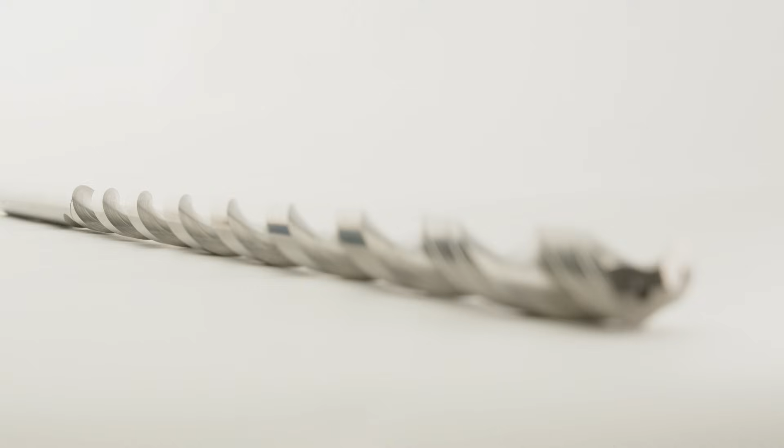Many modern cutting tools are designed with through coolant holes that deliver coolant directly to the cutting edge. The direct delivery ensures coolant reaches the area under the most stress, helping to control heat and improve cutting performance. The through coolant also aids in chip evacuation, which is especially critical in deep hole drilling, by flushing the chips away from the cutting zone.

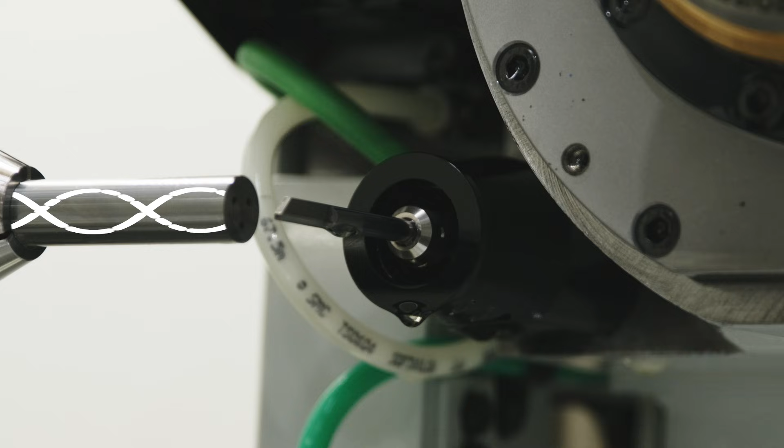These coolant holes are typically sintered into the carbide blank. Because they're fixed within the tool blank, it's essential that the cutting geometry is ground in correct alignment with the coolant paths. This ensures that coolant exits exactly where it's needed and that the tool performs as intended. Proper orientation of the holes relative to the flutes, margins, or inserts is a key consideration in both design and grinding.

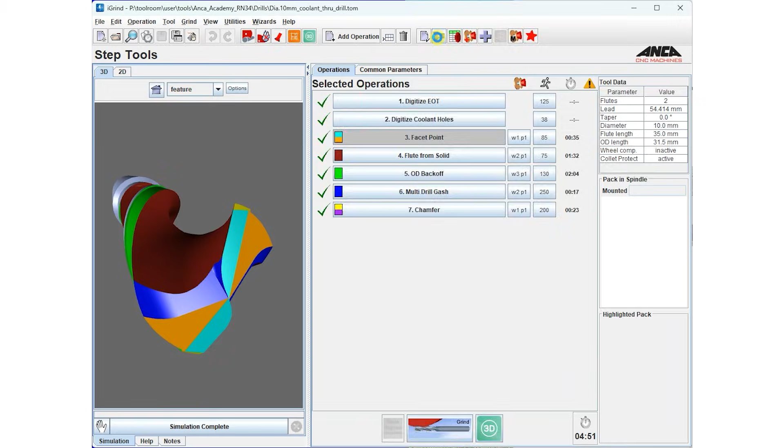The first step to making a tool with through coolant is to program the coolant holes in iGrind. Open the blank editor and move to the coolant holes tab. Here we can select from 4 different types of coolant holes. Simple holes gives 1 hole for each flute on the tool. The user can define the hole diameter and the spacing radius from the tool center.

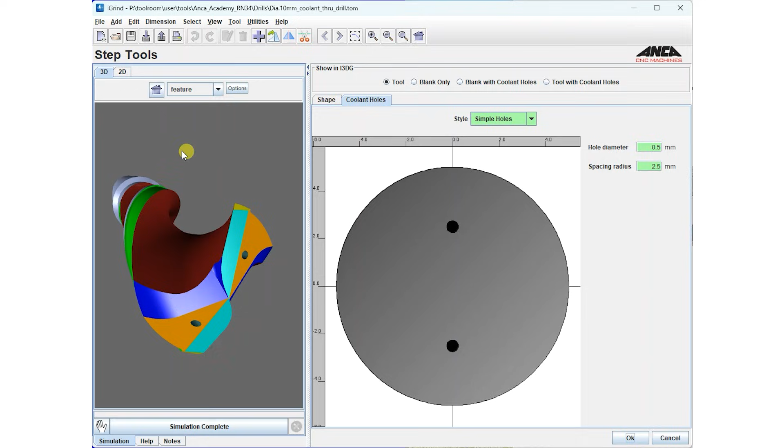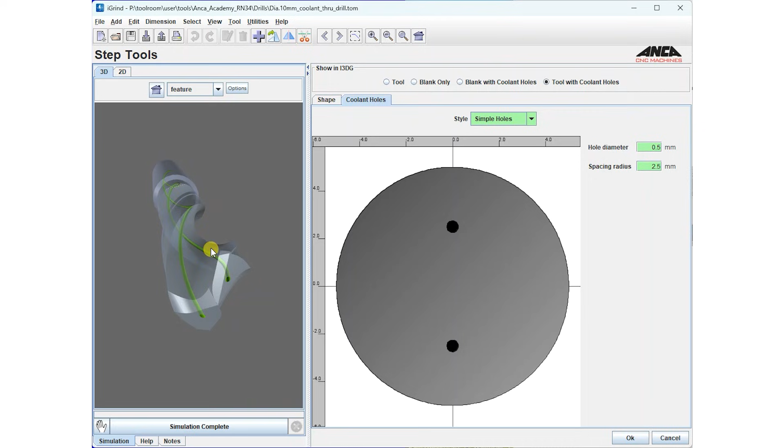We can also change the display in the i3DG window. Right now we can see the tool. We can change this to the blank only. We can have a translucent blank with coolant holes, or a translucent finished tool with coolant holes. And we can see with the simple holes that the holes follow the spiral that's programmed in the common parameters.

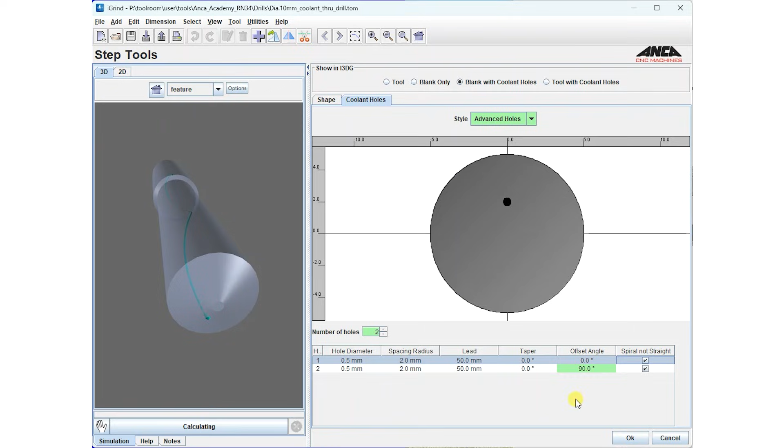The second style of coolant holes is the advanced holes. Advanced holes gives the user complete freedom in programming the coolant holes. The number of coolant holes and all parameters for each hole can be set independently. So we can change the hole diameter, spacing radius, lead, taper, offset angle, and we can configure the holes to either follow the tool spiral or be straight. And you can see that both these holes will act independently of each other.

The next type of coolant hole is a single axial hole. A single axial hole provides a straight hole running down the tool center, where the user can simply input the hole diameter. Not really applicable to this type of tool, but can be used on end mills and other types of cutters.

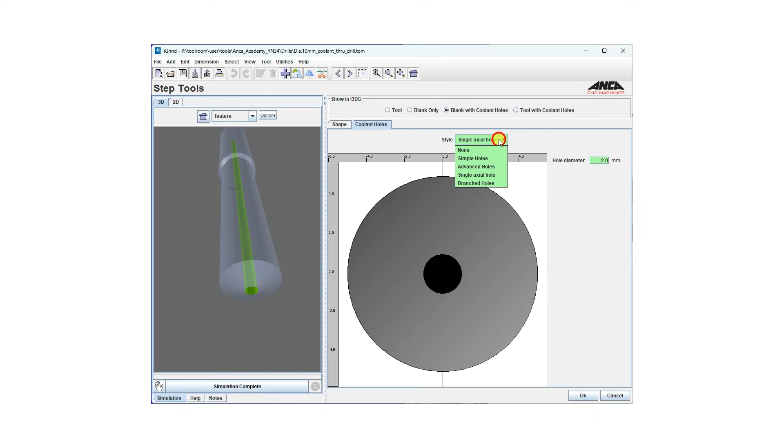The final style of coolant holes is branched holes. Branched holes sets a single axial coolant hole which branches off to multiple holes at specified points along the blank. Multiple branches can be set with configurable branch and rotational offset angles.

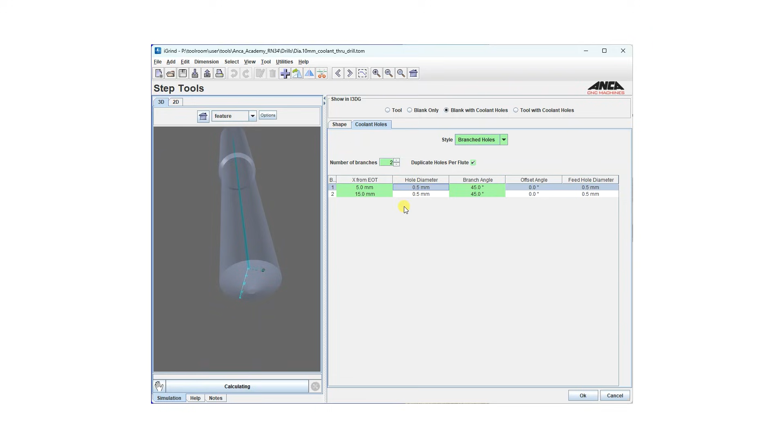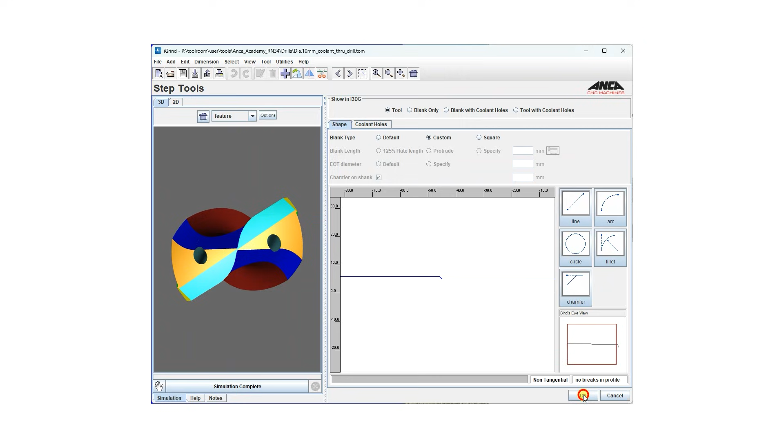Once we're happy with our coolant hole style, diameter, and positioning, we need to position the coolant holes in relation to the cutting edge of the tool. So to do this, we use the digitize coolant holes operation, and we can select the A offset from hole parameter. This parameter controls the angular distance between the cutting edge and the center of our coolant holes.

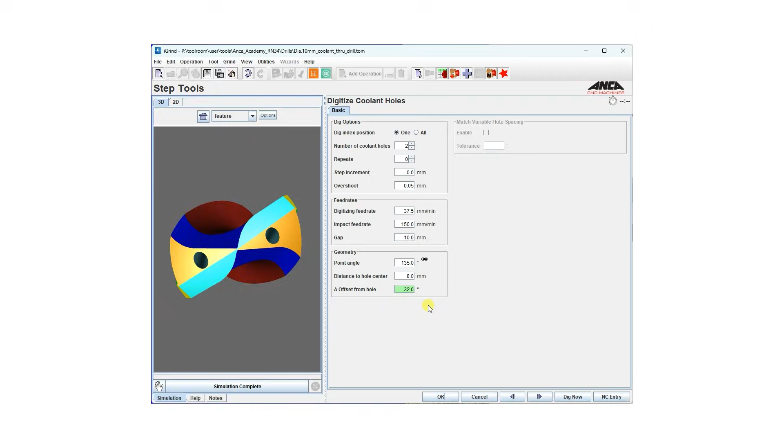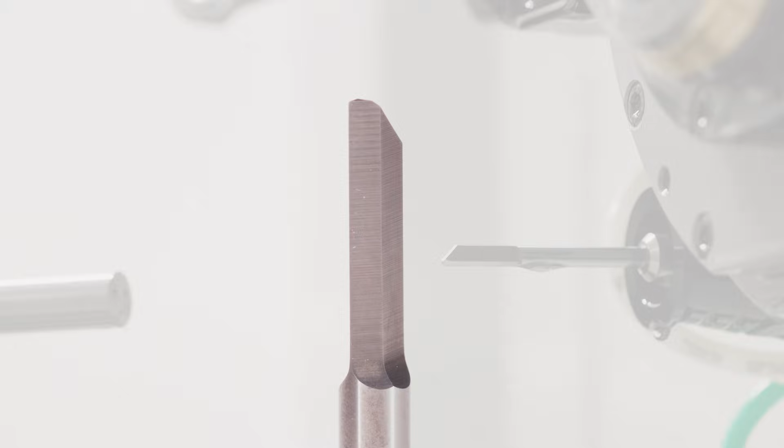Now that the coolant holes are programmed correctly and look good on the simulator, we need to consider how to locate the holes and grind the cutting features correctly on the machine. On the FX7 machine, we'll use the touch probe to locate the position of the coolant holes. The first thing to consider is the probe tip. In most cases for coolant hole digitizing, you'll need to use a right-hand probe tip, which has a chamfer on the right-hand side of the blade. This helps the stylus point access the small coolant holes more easily.

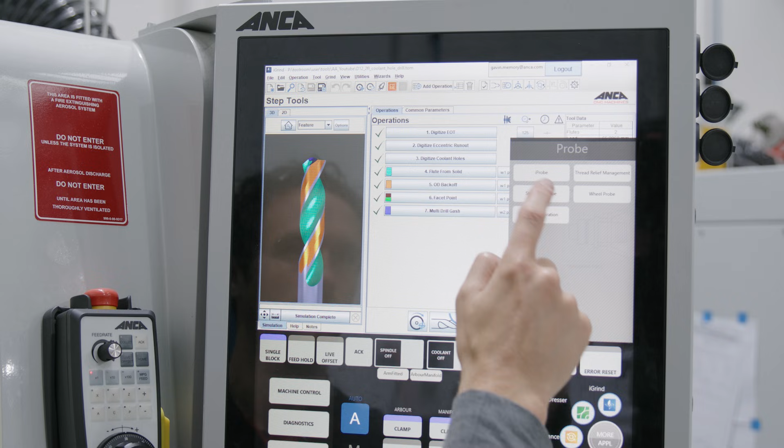If you're changing from a left-hand to a right-hand probe tip, make sure to run the probe qualification cycle from the probe menu. This cycle teaches the machine the size and position of the new probe tip so that it can digitize accurately.

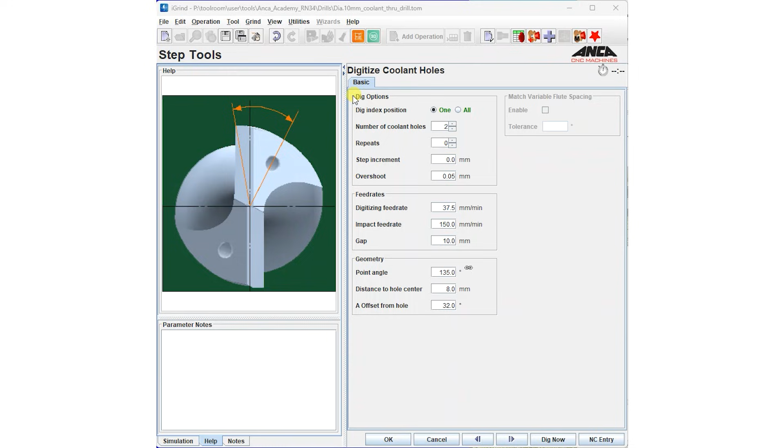It's important for the digitizing operation parameters to be set correctly, or the touch probe might not locate the coolant holes. In the digitizing options, we can specify whether we want to digitize all the coolant holes or just a single hole. Digitizing all holes would be required if the hole spacing is unequal. We must input the number of coolant holes. We can also add repeats, so if the probe doesn't locate the holes in the nominal position, it will shift slightly by the incremented amount and repeat the process to try to find the holes.

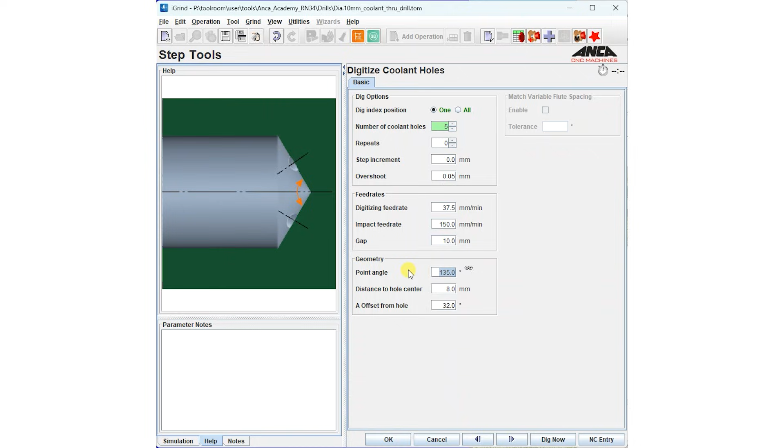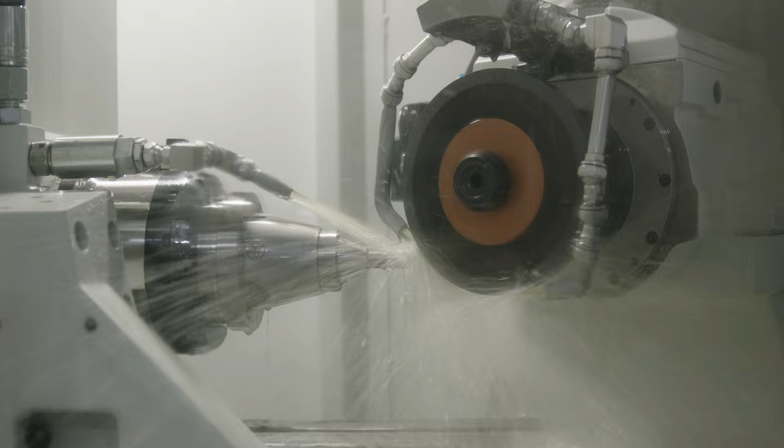In the geometry section, we need to input the tool point angle and the distance from the tool center line to the hole centers. Once the touch probe locates the coolant holes, the positions are saved and used as a reference for the tool grinding. The cutting edges are ground in the correct location in relation to the holes.

That covers the key points for successfully digitizing coolant holes with the Anca software on the FX7 machine. Remember to check your probe tip type and take a few extra moments to check your digitizing parameters. This will help ensure accurate results and avoid mistakes. More information on coolant hole digitizing can be found in the iGrind user manuals.